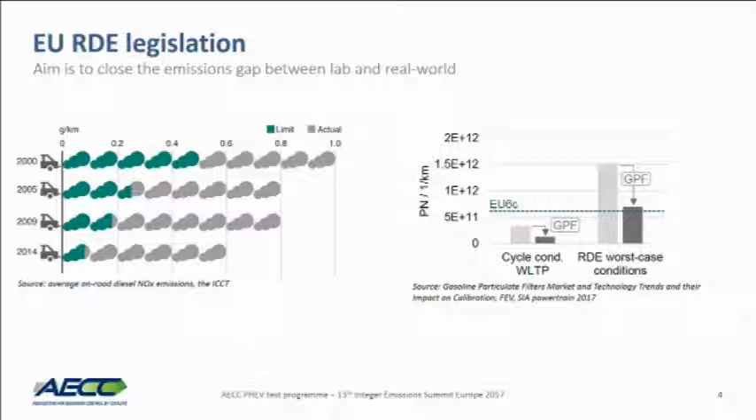Short summary of the RDE legislation, just the key elements that relate to my presentation. The NOx not-to-exceed limit, the emissions in milligrams per kilometer that cannot be exceeded on the road, correspond to the Euro 6 limit times the conformity factor. CF is defined for NOx and for PN, and applies to all cars to which a limit is defined.

So that means for MPI, for which there is no PN standard in Euro 6, there is no RDE requirement for particulate emissions for these cars. But for GDI and plug-in or hybrid vehicles that use a GDI engine, there is a NOx and a PN conformity factor.

There is a staggered introduction of the standard to new types and all new vehicles, but I will not spend too much time on that, as it's already been clearly described this morning.

What needs to be well understood is that there are boundary conditions defined to make sure the test being evaluated is not biased - not too weak, not too stringent, but representative of normal driving. So there are specifications to design your route. There are also boundaries on ambient conditions, meaning temperature, altitude gain, and some boundaries on driving dynamics.

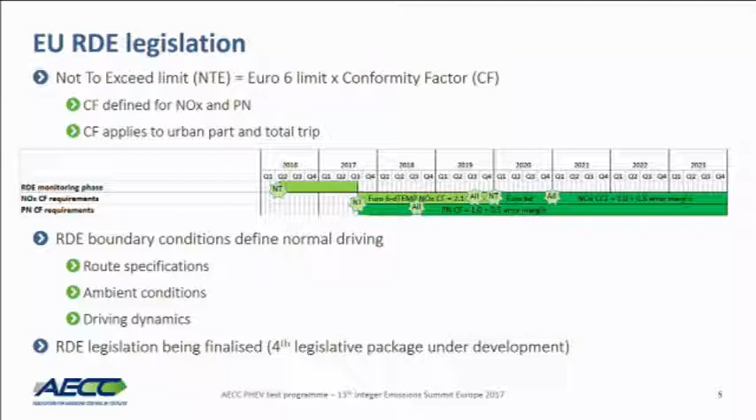The RDE legislation, we've heard, is still being finalized with the 4th legislative package under development, and that includes how you would post-process or analyze RDE emissions from plug-in hybrid vehicles. So what I will present today are raw emission data without any post-processing.

Our test program had as an objective to evaluate the real-world behavior of a car, a PHEV car that is supposed to be representative of the market. We selected for that purpose a PHEV car in the C segment, with a GDI engine in the class of around 1.5 liter.

This car was Euro 6B, so not RDE compliant, but still quite recent. The car that we rented had driven about 10,000 kilometers. This particular model has 4 driving modes that can be selected by the driver.

The electric mode makes the highest use possible of the electric motor, a hybrid mode that we'll describe a little bit later on. Interestingly, a charging mode, so that means you can recharge your battery using your internal combustion engine, which is not the most efficient way, but it's still a possibility on that car.

And a sports mode, which improves the interaction between the internal combustion engine and the electric motor to enhance drivability and the dynamics of the car. That particular car had an official electric range of 50 kilometers.

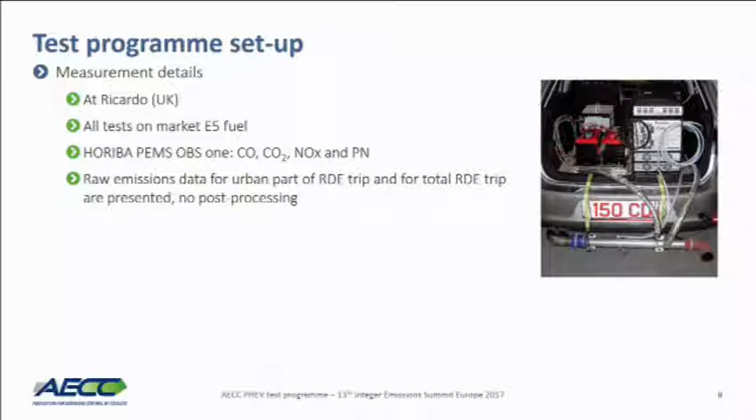We drew up a test matrix where we wanted to evaluate the 4 different driving modes offered on that car. We also evaluated the impact of the initial battery charging, so we varied the state of charge of the battery at the start of testing.

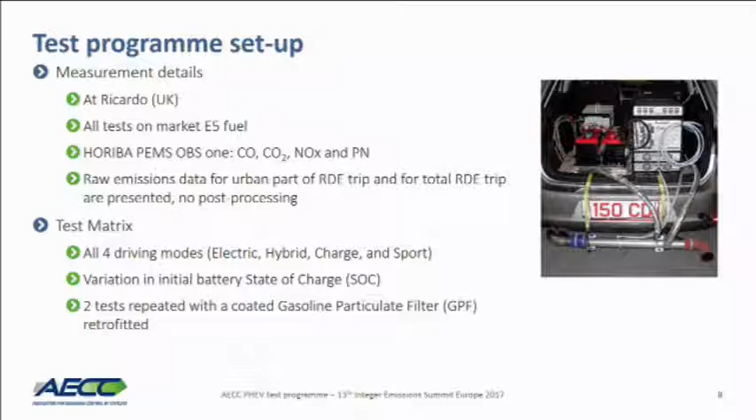For time and budget reasons, we only repeated 2 tests where the GPF was fitted in the exhaust line.

Just a short overview of our trip. It's in the UK at Ricardo, close to the seaside. You see the urban part in the city, and then you go into the rural area, and then finish on the motorway.

Here you see the speed. That's the urban part, then you go into the rural part, and then you finish on the highway.

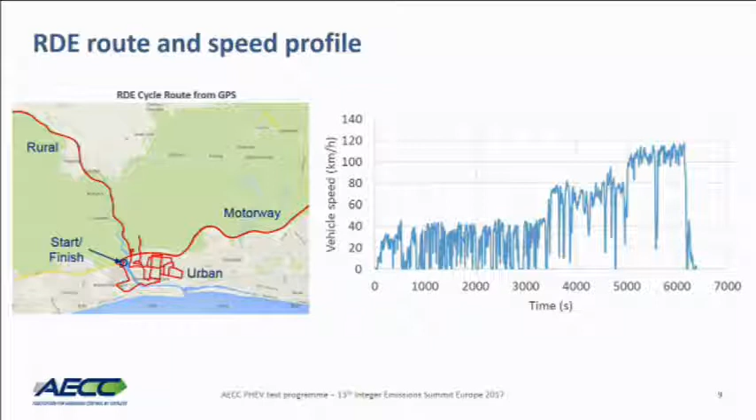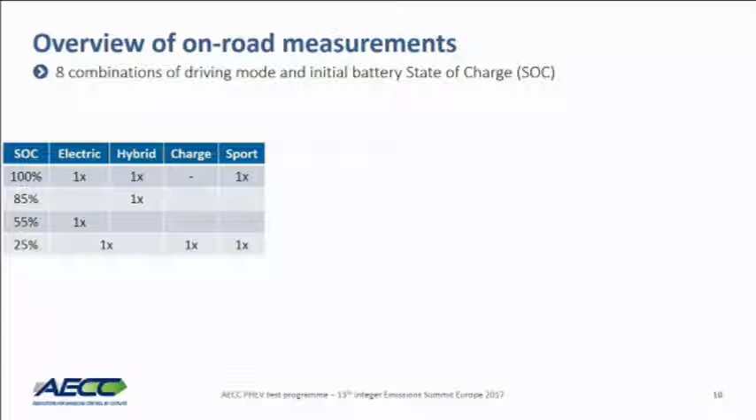So the test matrix that we measured were a combination of modes and state of charge of the battery. First, looking at the electric mode, you see on this chart the battery state of charge evolution during the PEMS trip on the road. If you start from a fully charged battery, you're in charge depleting mode until you reach the minimum level of battery, and then the internal combustion engine kicks in.

This happens during the rural driving part. But if you start lower, if somebody hasn't recharged their battery overnight, we tested here with a 55% initial state of charge. You will keep decreasing in charge depleting mode, and then the internal combustion engine will kick in and maintain the battery at that low level. There was even one test where we were already almost at the minimum state of charge, so it's basically a charge sustaining test that was run.

Then in blue we have the hybrid modes. This is a mode where the state of charge is maintained, some sort of a charge sustaining mode, even though it's not the exact definition in WLTP. If you start from a certain state of charge, the battery remains stable at the same level.

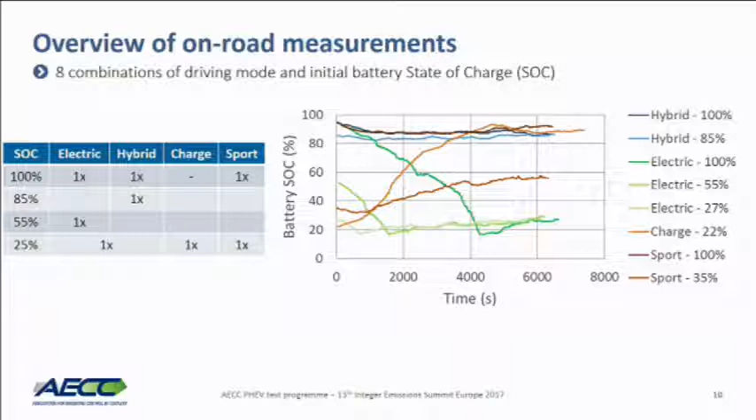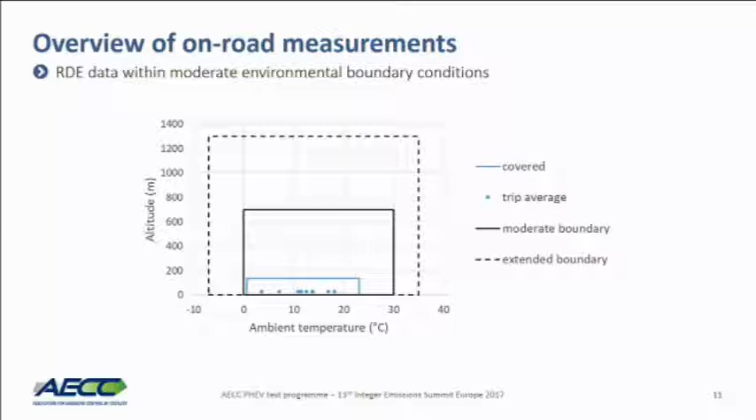We have two boxes. This is the moderate boundary conditions, in which the conformity factor applies directly. And within the dash line, the extended boundary conditions, in which you multiply your conformity factor by 1.6, so there is some further allowance for these extended boundary conditions. But all our testing were within the blue box, so all within the moderate boundary conditions, with a reasonable range of temperature, but a relatively low altitude because we were close to the seashore.

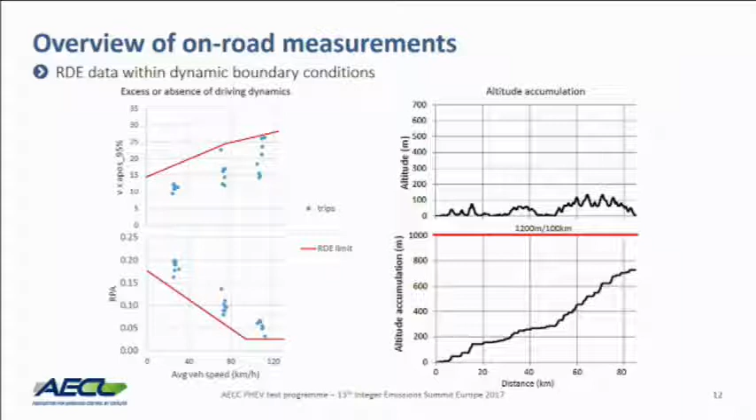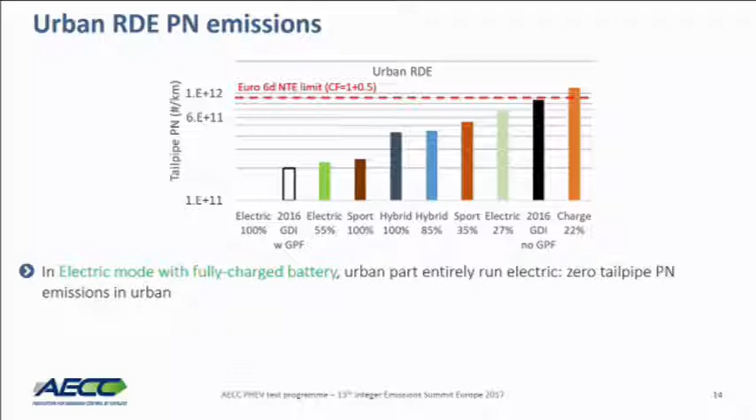So now if I come to the emission measurement results. We see that on this chart, this is for the urban particulate number emissions only, and we see the different modes that we tested together with the initial state of charge of the battery. The green bar is absent - this is the electric mode with the battery fully charged, and we've seen that we are depleting the battery throughout the entire urban part, so obviously that results in zero tailpipe emission during the urban driving.

For all the modes, we have some urban emissions, and we see that in the worst case, with the charging mode, we even exceed the conformity or the not-to-exceed limit with a conformity factor of 1.5. This is because of the high power demand on the ICE.

If we look at all the other results, these are the different modes with this PHEV car, and we compare with our previous GDI car that we had tested last year. We see that this GDI without a GPF was here in the black bar, and when we had fitted the GPF, then we were here. And you see that all the PHEV results, except for this very high number, fall in between these two values.

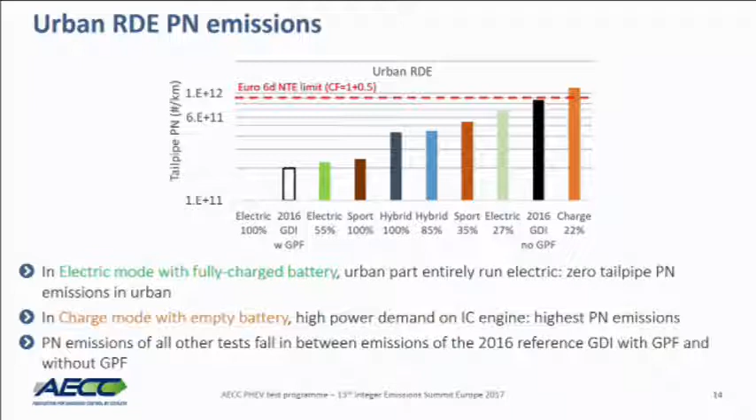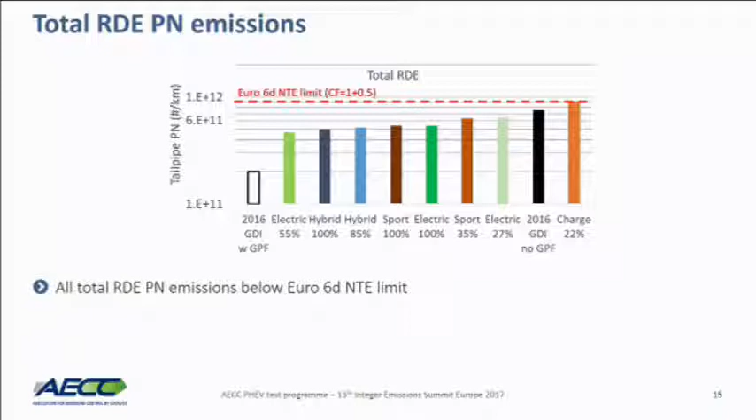Now, if we go to the complete RDE tests, so the total 80-something kilometers of tests on the road, then we see that in that case we are all below the not-to-exceed limit, just borderline for the higher tests. And in that case with the electric mode, 100% battery charge at the beginning, where we had zero tailpipe emission in urban, then for the total trip we are very much equivalent to any other test, including not much lower than the GDI car without a GPF.

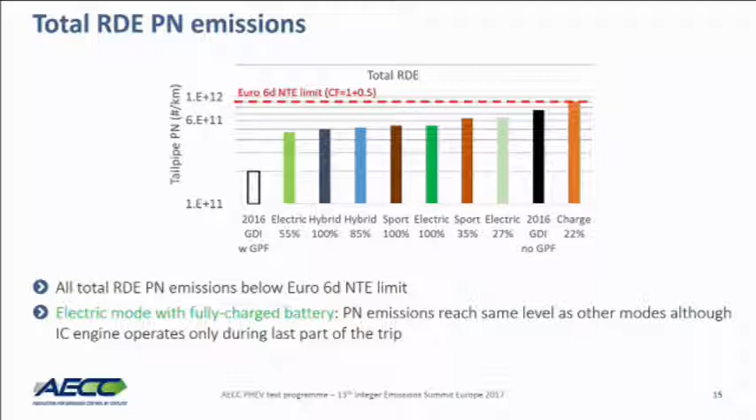So we'll see on the next slide the reason for this very high number, and that's on this chart. The PN emissions in total are very much linked to the cold start of the internal combustion engine on the car, which, I repeat, is not RDE compliant, so there is probably some improvement that can be made from the engine management, but that's how the car performs actually on the market.

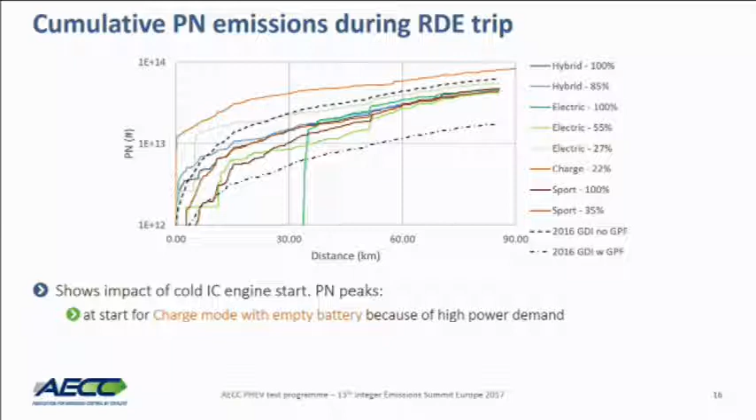We see that, for example, in the charging mode, where the ICE starts immediately and is very highly demanded because it has not only to move the car but also to charge the battery, then we have an initial spike of PN that is really high. And for the electric mode with fully charged battery, the internal combustion engine kicks in here and has an extremely high spike. There is a high power demand at that particular moment in time, and the whole engine and exhaust line is cold, and that results in this very high level.

In the other electric modes, we also see that big impact when the internal combustion engine starts. And overall, if we look at all these values from this PHEV, they all fall in a relatively small range.

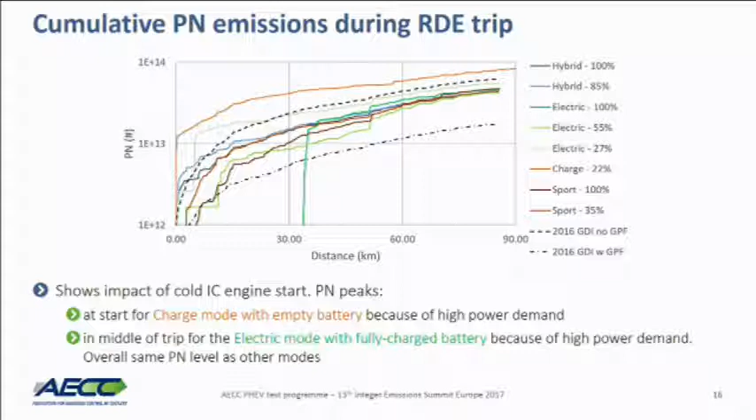This is compared, for example, to the GDI car that we had tested. This was without a GPF here, and once the GPF was fitted, the emissions were there. Then we retrofitted the second three-way catalyst, because this car has a close-coupled three-way catalyst and an underfloor one.

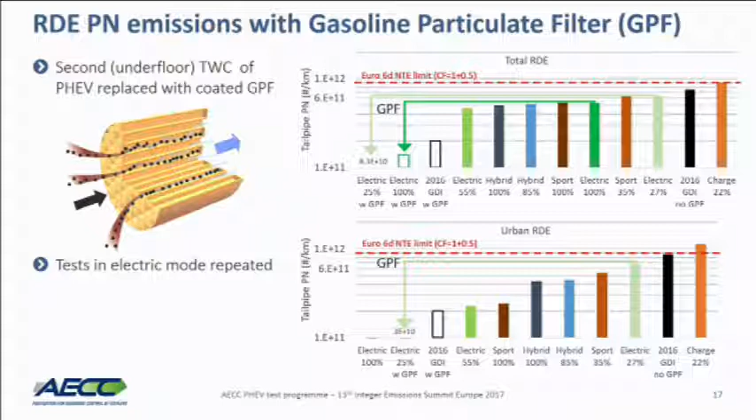So we replaced the underfloor one with a coated GPF. Looking at the particulate number emissions, we have the total RDE on top and the urban RDE below. We repeated two tests in electric mode, one with a fully charged battery and one with a 25% battery charge at the start. We see that the high spikes in emissions observed when the internal combustion engine kicked in are well controlled by the GPF, with emissions much lower than the not-to-exceed limit, and even lower than the GDI car fitted with the GPF. That's observed for the total RDE and also for the urban RDE, where we had some emissions in the urban part.

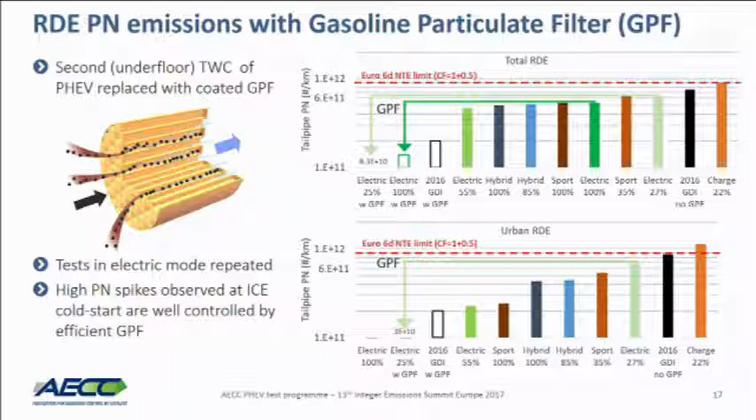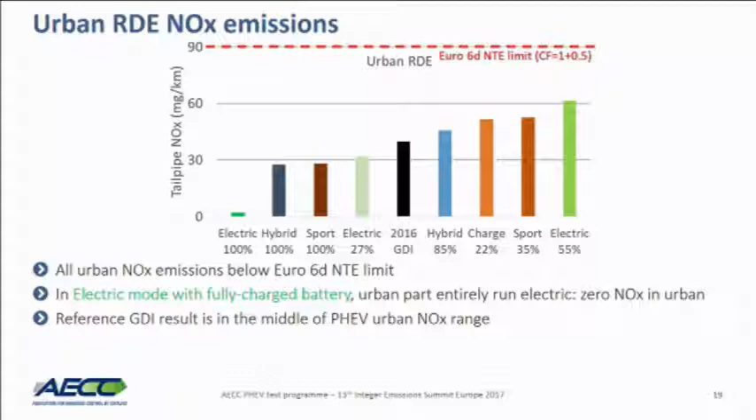If we focus on the urban part, meaning all emissions emitted when the car runs at a speed less than 60 km per hour, we see that again we're meeting the not-to-exceed limit for all test conditions for NOx. In the electric mode 100% case, there's a small figure because of some vehicle speeds below 60 km/h that are outside the urban part, in the rural part - but geographically, if you concentrate on the urban part, there's potential for zero NOx emissions there. Again, the GDI vehicle results fall in the middle of the various performances observed with the car.

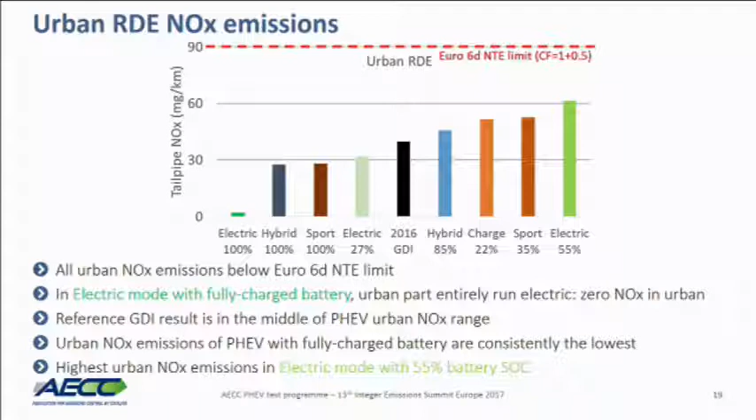Again, with a properly charged battery, that's when you get the lowest NOx emissions. But it remains to be seen whether a customer would consistently recharge the battery as expected. An interesting point here - even though we're below the NOx not-to-exceed limit, we see that in electric mode but with only a partially charged battery, that's when we get the highest NOx emissions.

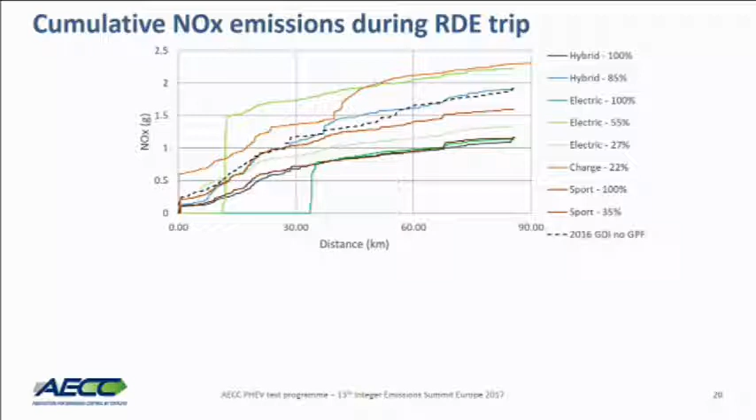This relates to the 1 second data throughout the RDE trip. We see that when the internal engine kicks in, when the battery reaches its lowest level, you get quite important NOx peaks that need to be addressed by the three-way catalyst. So there's some impact from the cold start with the charge mode, which is very demanding from the beginning, and also with the electric modes falling in the middle.

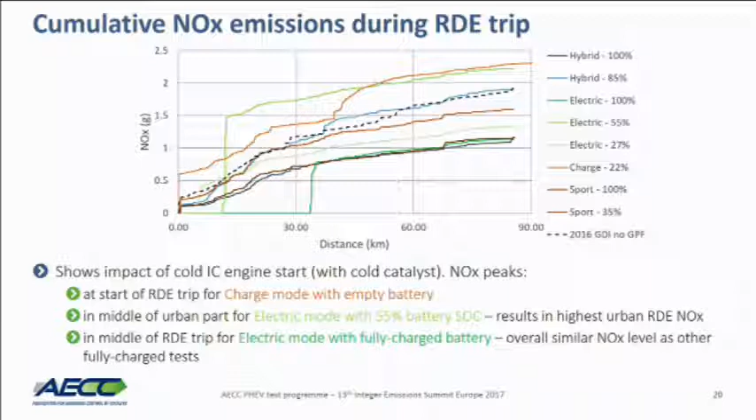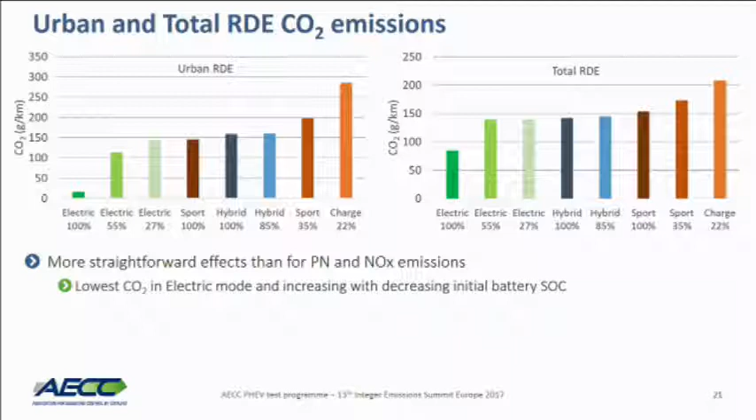Final set of data on the CO2 emissions measured with that car. In this case, more than for pollutant emissions, we see a more straightforward impact of the level of battery charging and the modes used on the vehicle. The lowest values are shown here for urban RDE and here for total RDE. The lowest CO2 measurement is achieved in electric mode with a fully charged battery, and it increases as the battery level decreases. So the less your battery is charged at the beginning, the more CO2 you get, reaching a very high CO2 value of almost 300 grams per kilometer when operating the car in charge mode.

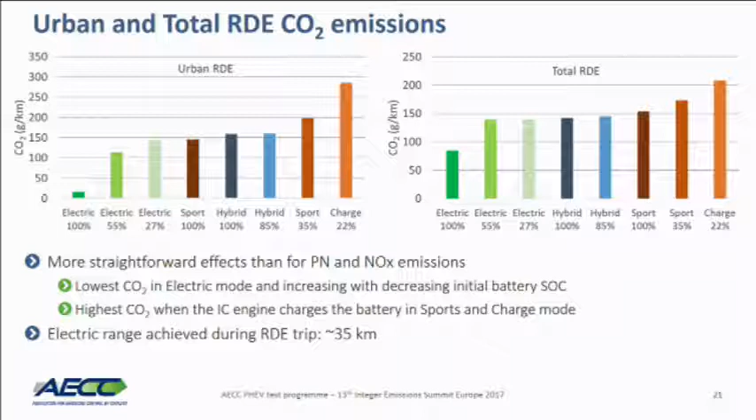This also comes with the measurement of the electric range achieved with the car. The official value was 50 kilometers on the COC of the vehicle. What we measured with this car, which was relatively new, was about 35 kilometers.

So to conclude, this test program was for us the opportunity to test one somehow representative Euro 6B PHEV in the C segment, again not showing any data post-processing, as this is still under review for the legislative package 4 of RDE.

Observations on PN and NOx real driving emissions are that there is zero emission capability in urban environment, and that is ensured when the electric mode is used and the battery has been fully charged. For NOx results, in all conditions we were meeting the not-to-exceed limit, which was a very positive outcome.

On the particular vehicle that we tested, this plug-in hybrid, we see that the timing of the internal combustion engine cold start during the RDE trip has a very important impact on NOx and PN emissions. We observed high spikes when the IC engine started, but these spikes are well controlled by an efficient gasoline particulate filter.

Well-integrated exhaust after-treatment is required to efficiently control emissions under all these RDE driving conditions, and that will include thermal management most likely. So this is a first report on the results of this test program, but we have investigated more on this vehicle, and we will publish that in the coming month, as this is quite recent.